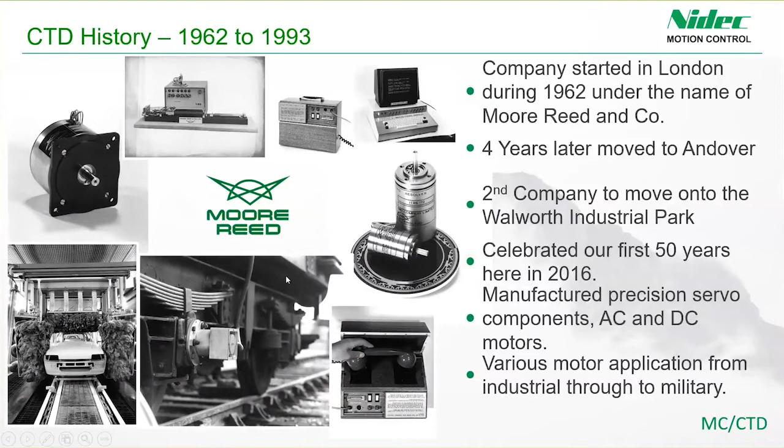The initial expertise of the company was to manufacture servo AC and DC motors for all applications, but mainly for military use. That was the initial kind of product line for CTD.

After 1990, we were purchased by Control Techniques, and since then we've been called Control Technique Dynamics. After being acquired, we focused more on industrial automation, building all our experience in industrial servo motors. We joined Nidec back in 2016.

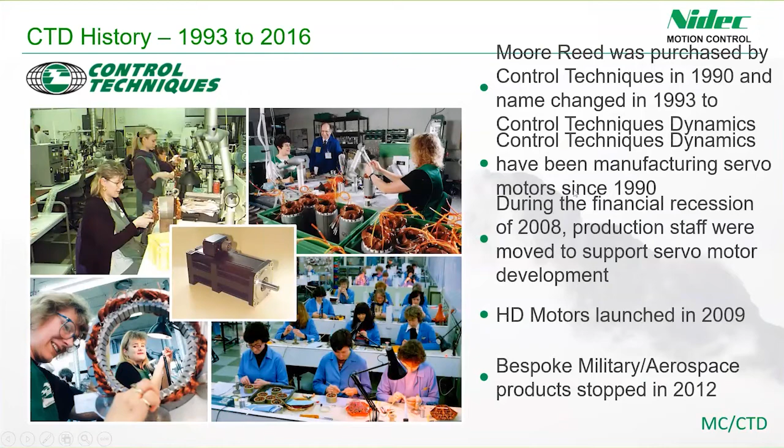When you look at our current portfolio, we have two main families: the FM and the HD, relatively new families in the market, but also quite mature, more than 10 years in the market. The FM is from 2007 and is our legacy product, and the HD was introduced to the market in 2009.

Within Control Technique Dynamics, we have all the necessary experience and departments to develop technologies like this. We can do everything from design to manufacturing. We've got our R&D, which is our cornerstone for the company. All the technology comes from our R&D department.

We have a very competent engineering department, mainly focusing on materials and how to make the product robust. We have our rapid prototype development team, which turns our ideas into prototypes very quickly, and then this is moved to research and development to perform rigorous testing to make sure the technology and ideas are according to what we think. After we qualify and validate the product, we move ahead to introduce it into production. We also have a very competent quality department, which takes all the quality matters from suppliers up to the product, ensuring we deliver quality product to the market.

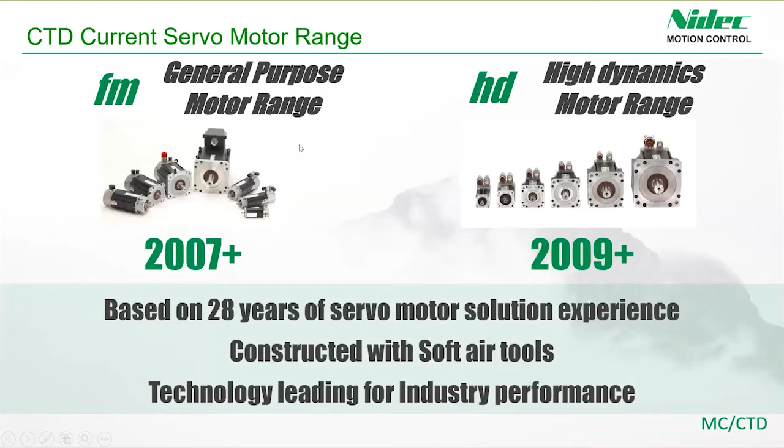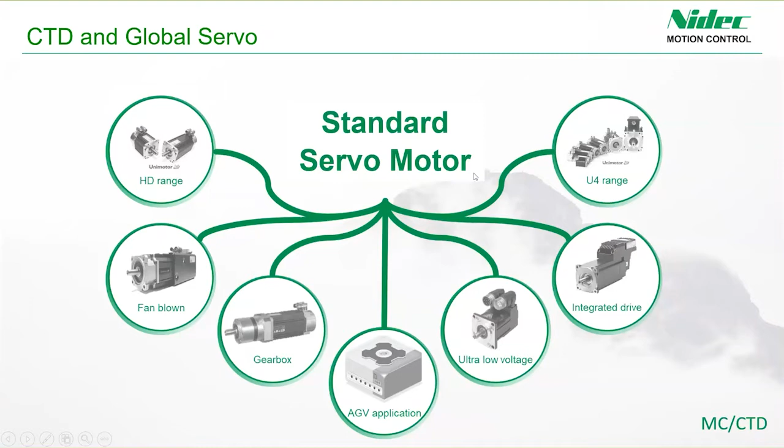Starting with the HD - HD technology stands for high dynamic. This motor is designed to offer the best torque density in the market. We are able to deliver torque in a much smaller size than our competitors, which has a lot of benefits: lighter motors and more compact design. That's one of the main benefits of the HD frame.

In order to achieve that, we patented many of the technologies, like the lamination of the stator and rotor, which are fully patented, and the way we wind the motor, which is also fully patented. These patents are owned by Control Technique Dynamics, so we have a very unique way of manufacturing that particular motor, allowing us to achieve very high torque density.

Obviously, when you look at it from a high power, continuous power perspective, HD is not the best motor to select - that's why we have the other family, the FM. But still, the HD can achieve up to around 85 Newton meters on the 190 frame. When we talk about the frame, we mean the square.

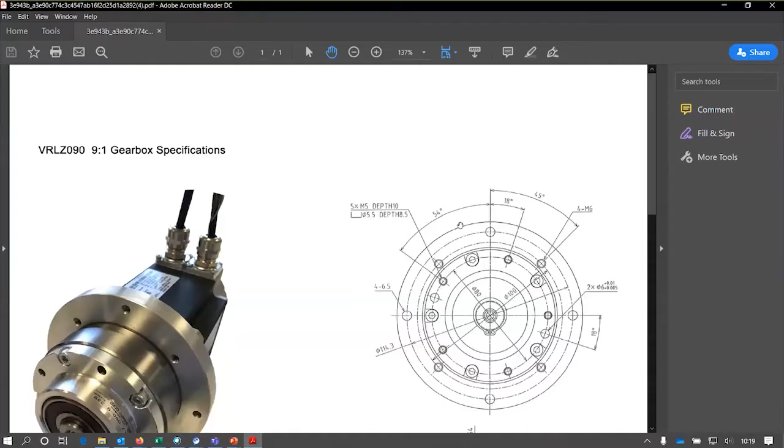If you click on view our work, you can download all the data sheets of the motors and the drive. If you click on each one, you'll download the PDF where you can see all the dimensions, and down here you can find all the electrical specifications of the motor.

This is quite a good way to demonstrate to the customer that we understand the application, we understand the complete system, and we are able to offer a solution to them.

On top of that, we have the quick start guide. Basically, when the customer gets the motor and drive, we have a 5-minute setup time. If you click here, it will bring you to a downloads page, and if you open that, that's the quick start guide we have.

I can quickly demonstrate how it is. It's a very intuitive way of how to connect everything and get you going. It shows you exactly how to operate the software.

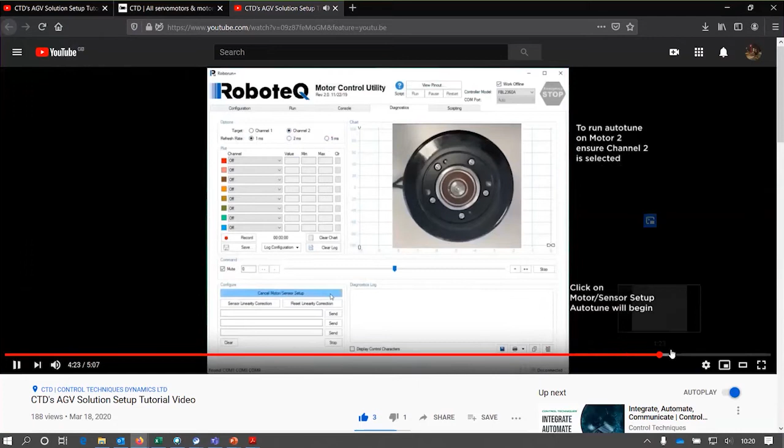And if that's not enough, we have obviously the video. On our YouTube channel you can see the video. We basically show step by step how to connect, how to make sure the correct drive software is downloaded, and how to turn the motor, including how to perform the auto tune. We've put a lot of effort into making the customer's life as easy as possible.

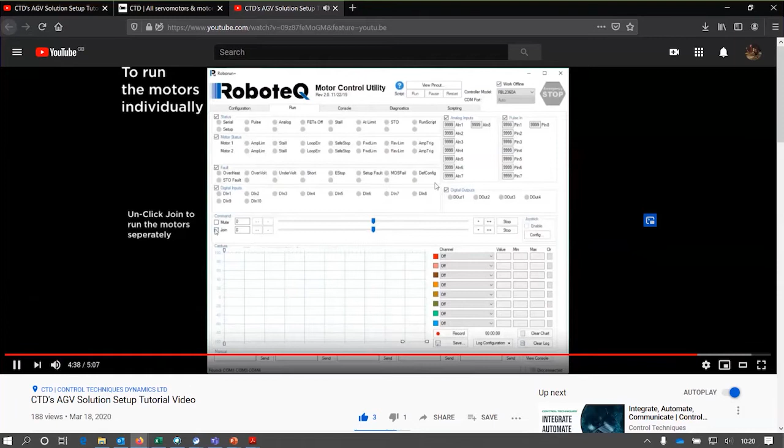I think that's very important when a customer just takes a product, to get it going very fast.

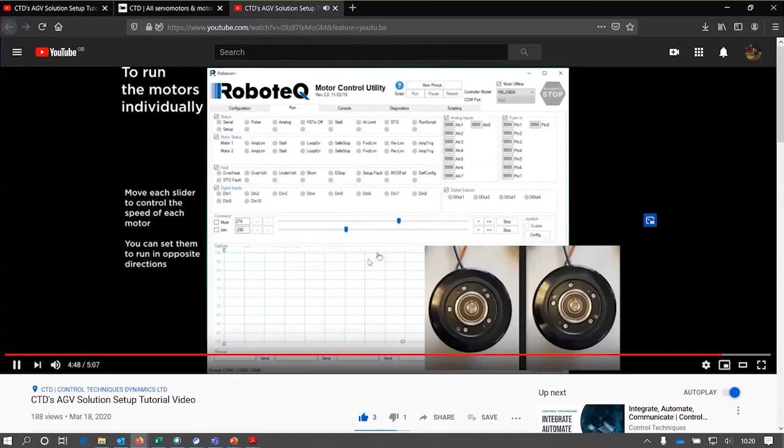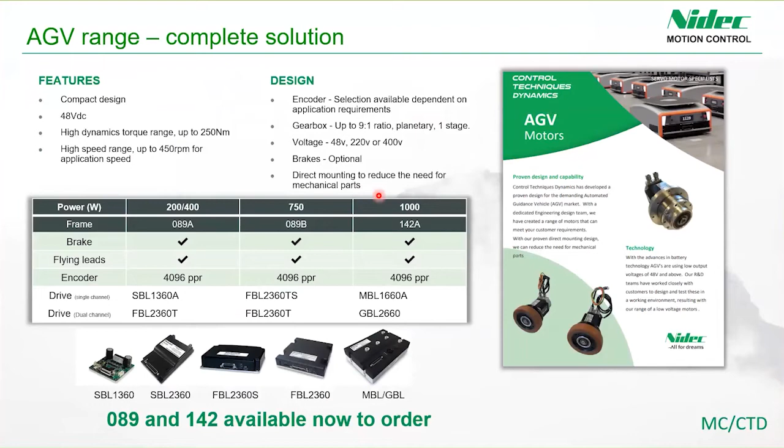Now moving forward, another addition to the HD family is called the HD Lite. It's a frame size of 40 and 60 — these are very small motors. Again, we've seen a rise in the industry for particularly small frame sizes. A lot of robotic manufacturers build these small SCARA robots, so they're looking for a 40 millimeter and 60 millimeter motor.

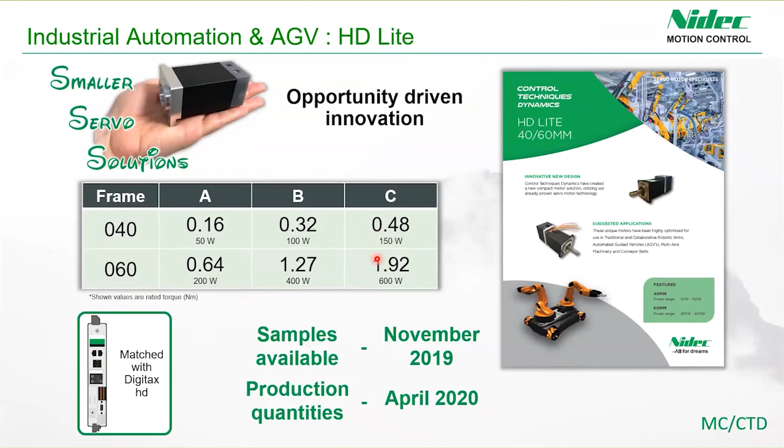In terms of marketing material for that one, it's still not a very mature product. We're supplying samples, we have production ready, but we're still working with our beta customers. We have some launch partners we've supplied production samples to, but slowly it's coming into the picture, and we're now preparing the marketing material for it — our website will be updated soon with all the materials.

The next thing I want to talk to you about is the gear motor. We have this idea to promote to the market a 10-day lead time motor gear option. To be honest, it's been running for the last 6 months, but we didn't promote it that much. I think it's a great opportunity if you'd like to give something quick to the customer to test, using that 10-day delivery.

I understand that sometimes we don't have the optimum gear ratio, but the idea is to push to the market what selection we've done. As I said, we cover a lot of power range, so you can download all the catalogs from our website and see what power we cover in the geared motor.

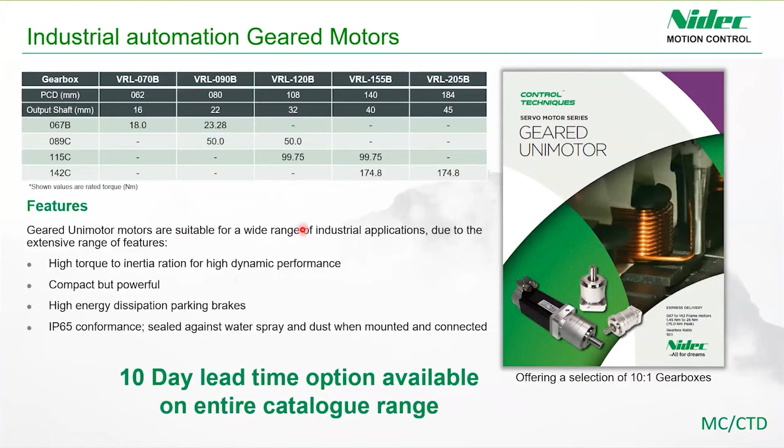So the next I would like to talk to you about is the torque motors. We have a range called the torque motor. Basically, it's a frameless motor. We don't have any end frames or encoder mounted.

The main idea here is to utilize an existing shaft in the machine. So if there is a printing press and there is a drum and a main shaft in the machine, you can use that to integrate the rotor. The rotor will slide on the drum, and then you will fix the housing in the frame.

Typically these motors will have a Hall sensor, and those machines, because they need quite accurate position, they definitely have a feedback somewhere else in the system, maybe on the other side of the drum. So they use that feedback for positioning, and they use the Hall sensor just to detect the initial position.

We have developed a flyer for that particular one, which will go live in a few weeks, so I can show you now. Give me one second, because it doesn't open for some reason. I'm sorry.

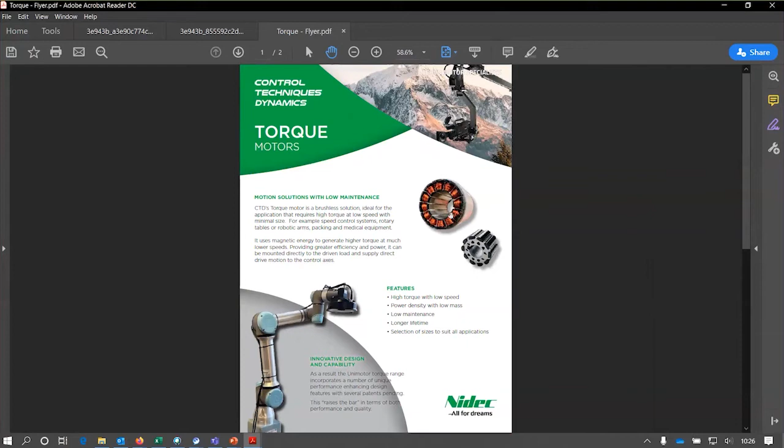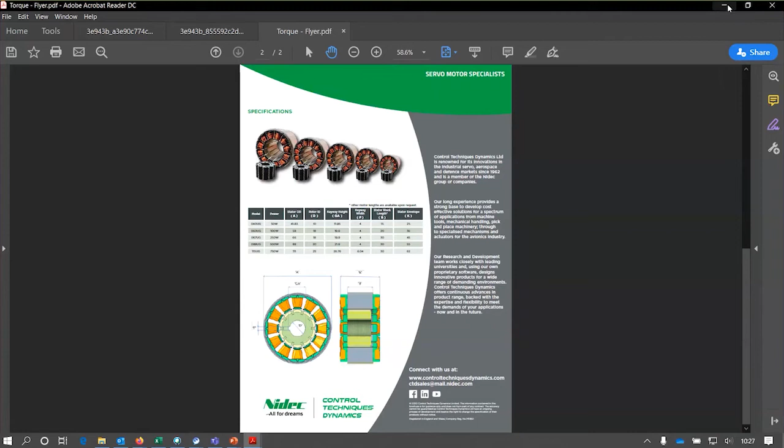A lot of applications go down that route. Maybe some robotic companies also go down that route. We are looking to create a family with the FlexWave gearbox, if you know the FlexWave gearbox from Shimpo for the robotic industry. So that's coming soon.

There is one question on the chat about the low voltage integrated servo. There is a plan to introduce a low voltage integrated servo. We launched a product at a very initial stage with RoboteQ, like a motor with a drive at the back. We have had some challenges because, as you know, it's not the easiest thing to combine electronics and a motor together. There are a lot of challenges to having a very robust product in the market.

So we are in the process of kind of releasing it, but as it stands today, the product is not ready. But yeah, we are in the process to release that.

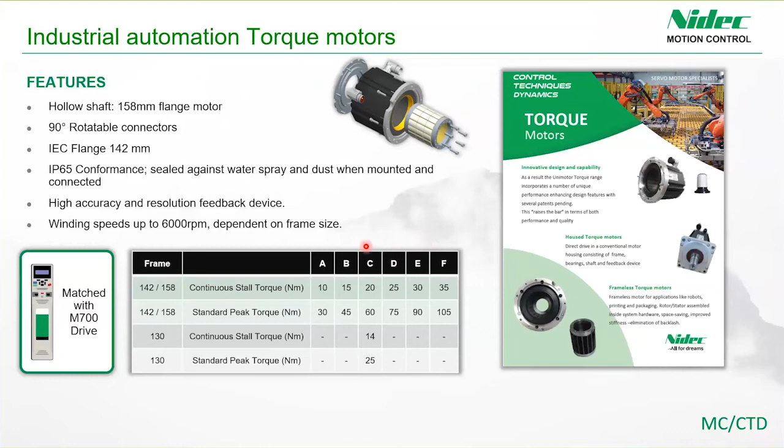The next family I would like to talk to you about is the FM. So the FM is our legacy product. It's designed for high power, constant speed. We typically can achieve quite high speed across all the frame sizes. You can find all the relevant catalogs again on our website.

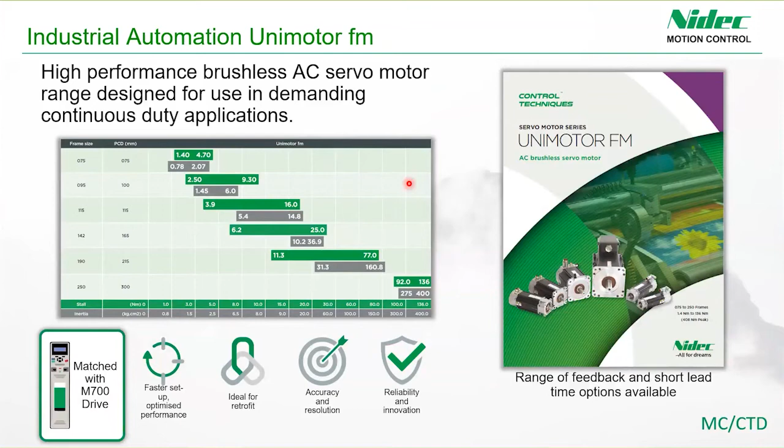Part of the FM family is fan blown, for increased power. We selected from the 142 up to 250 frame. We supply the motors with a fan box. To get, I mean, some of the motors that go to quite high power, they require a terminal box, so we have that option as well.

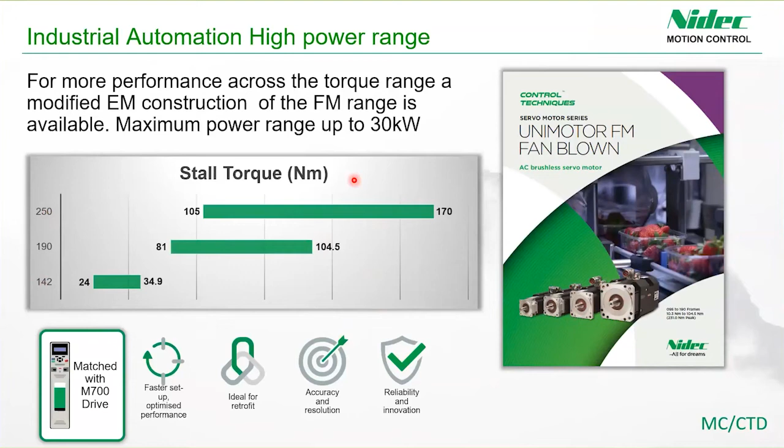I would like to spend another 5 minutes taking you through our website, just to familiarize yourself with our environment. So as I said, you can see our motors here, all the families I talked about, they are here. You can click each one of the families, and it brings you to a new page.

Basically, you can download all the brochures for each family. You can find all the advantages, all the capabilities for each family. Again, in the application section, you can find all the options we have - motors we have developed but are not part of the catalog. So first of all, let's say you click on entertainment, and click on 'view our work', you will see some specially designed motors, but you will not find them in the catalog.

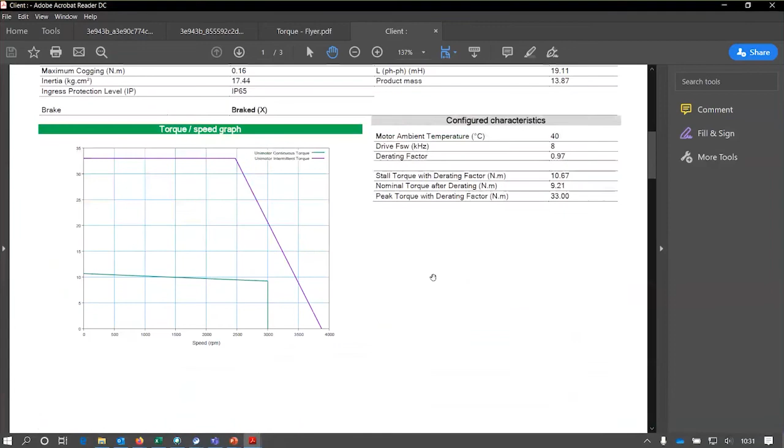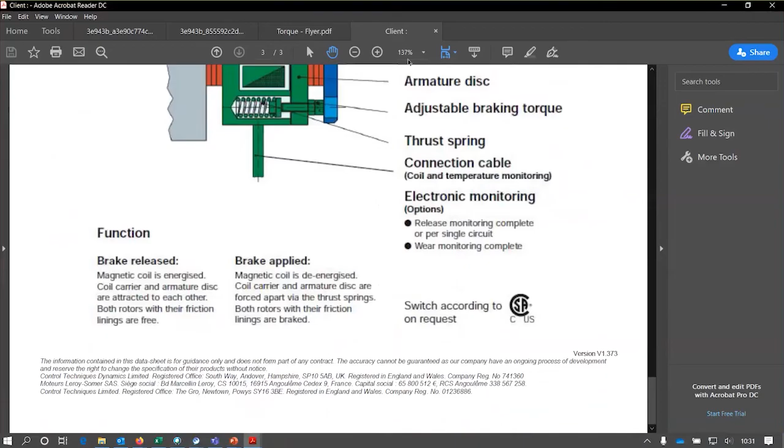Typically this application requires a manual release brake. You can see these solutions that we have done for various customers, and we can produce them, but we don't have them in catalog. So if you have a customer like this, you can come here and download all the data sheets, all the 3D and 2D drawings, all the specifications about manual handling, release brake, and everything. It's a good way to find motors that are not listed as a catalog product.

Same with textile, same with printing, same with every other industry that we have. Going to the support section, on the downloads you can find all the catalogs and everything on installation manuals. This is the technical data, a catalog that includes everything. It's quite a big catalog that includes all the ranges, all the options available, so it's a good way to have everything in one place.

When it comes to downloading some 3Ds or 2Ds, we have the configurator that is developed by Leroy-Somer, a company in France. You can select your region and language, so for here I'll just select English. Basically, with this one you can find all the motors available for Control Techniques and Leroy-Somer.

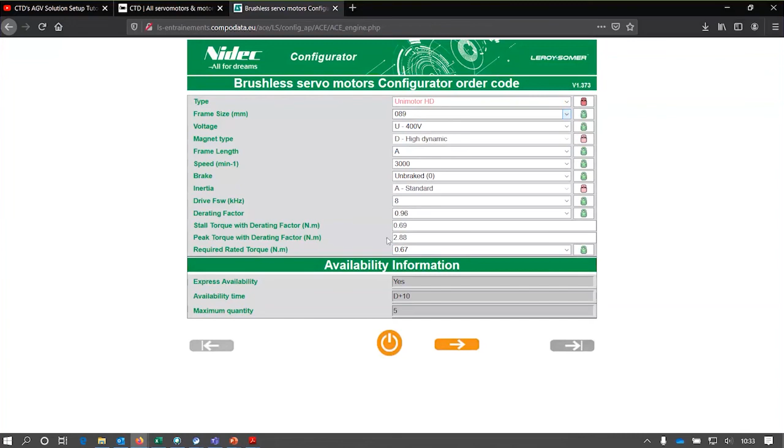So if you want a servo motor, you can go to motors and click servo. Then there's an option to select - the software will select a motor for you based on your specification, or you give a torque and it gives you options, or if you know which motor you want, you can select by reference. I'll just go here for simplicity, and there you open the page, and you can select what product family you want, what frame size you want, and all the other options available - what voltage, what frame size, what encoder, what shaft you want, if you want any thermistor.

Basically if you click here, you can get a rough price, but this price is just for one piece. You can get a 2D drawing here, so you can generate a step file or 2D drawing, download it and send it to the customer. So that's the configurator.

Yes, we are planning to add that - it will do the low voltage selection. At the moment, we don't have a low voltage selection in the configurator, so we are going to introduce it in the future.

When it comes to about us, you can find all the career opportunities, our expertise, read about the history. It's a very good way to really present the company to the customer. We have a very rich history, and we are specialized in our industry - that's what differentiates us from many other competitors, that we are specialized in the servo industry.

We have all the blog and news, so you can download them. That's a very interesting section of our website - we try to keep it updated with what is happening generally. When there is something new coming, we have our blog, so you can read our thoughts about COVID, or our thoughts about a few things that are happening in the automation industry.